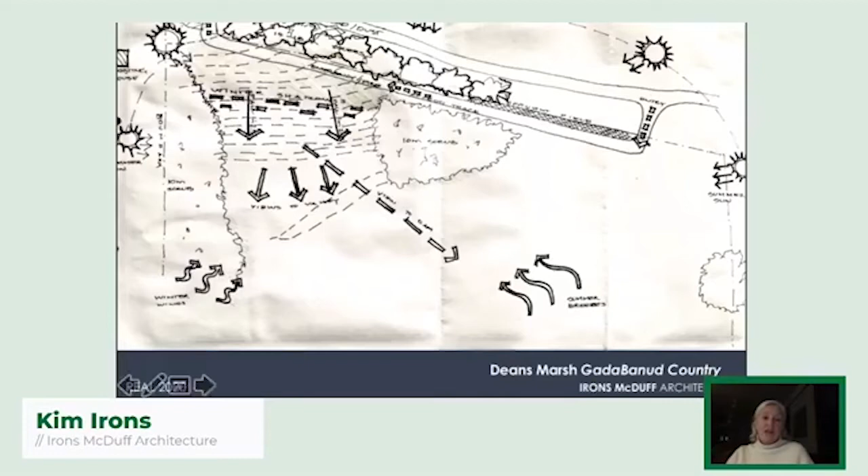We also explored the context and especially the utilitarian shed, which the client was very drawn to. As you can see from this too, that idea of light structures on the landscape that are elevated above the ground plane, and in this case to also deal with flood levels.

So the proposition was a very long building that takes in all of the views across the site, almost like a form of shearer's quarters in a long extended row, but then cranked slightly to follow the contours of the site. Walking through, there's the main entry which enters at ground level, and then into a sort of discrete hallway until you go past these windows that expose the views.

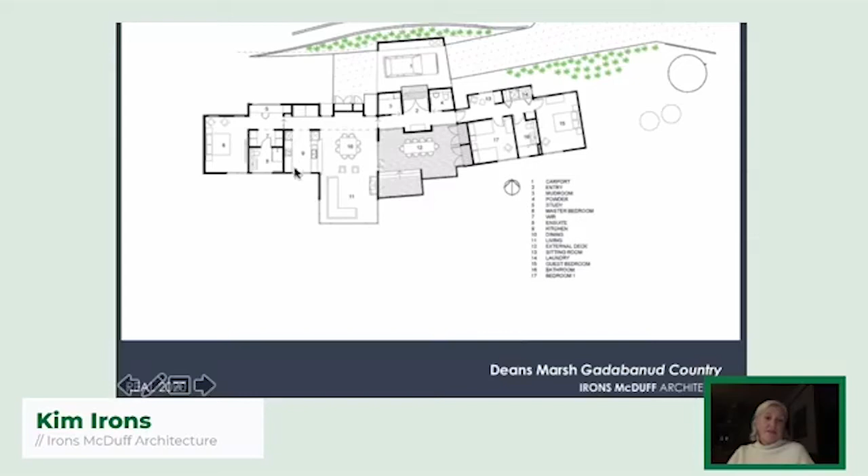Off to the left here, which is towards the west, is the dining and kitchen area, and then the main bedroom suite, ensuite, etc. And then to the right-hand side of the page is really the guest quarters, so 2 bedrooms with a bathroom and a small bunk space area.

The proposition becomes something that you enter at ground level to the roadside, but is well elevated on the southern side. There's approximately a 4 metre drop from one side of the building to the other, and it's only 5 metres wide.

The structure at ground is restricted to a series of columns into foundations that actually bind the ground in, to reduce the slippage component of the whole property.

We also explored through this the idea of the collection of sheds as additions, which we often see in the local vernacular, into the principal form, particularly where the lower pods are to the front, are specifically lower so that there can be high-level windows above them.

In another bushland setting at Aireys Inlet, we explored similar principles, but in this case there were adjacent dwellings on the slope site, either side and across the road. So we investigated how we could flow the house down the site and create a compact footprint while retaining a sense of bush escape for city visitors.

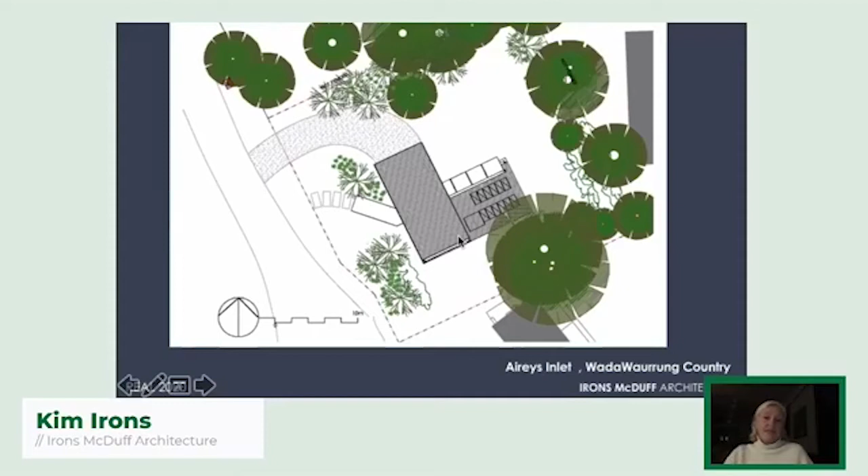So the principal form really wraps itself like an arm, sheltering the northern garden area from the southwesterlies and focusing on the bushland space within. Working through diagrams used to explain the approach, we also filtered the integration of aspects down to associated elements, including sun, ventilation, and views.

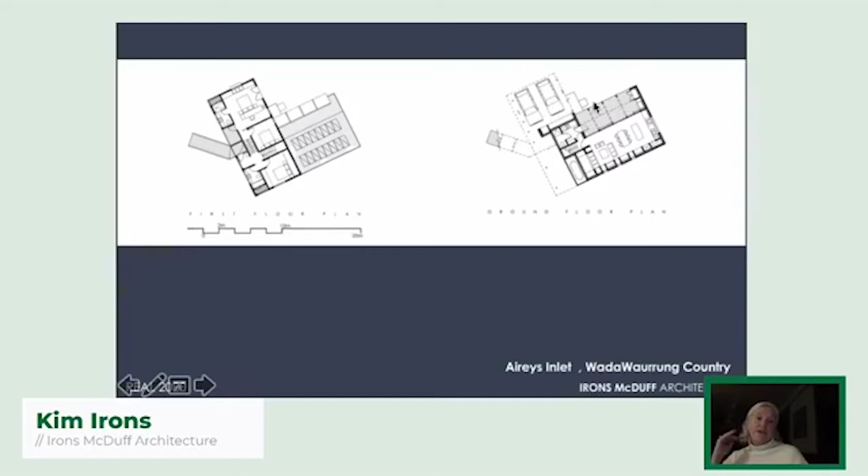The floor plan can be a little bit complex to understand. The left-hand side shows what we call the entry area, a ramp that leads up into the principal sleeping zone with 3 bedrooms split on 2 levels, and then down a flight of stairs to the right, leading into the broader kitchen living space. A north-facing deck also becomes the second entry into the house with car spaces adjacent.

When we also go analysing sites, there are others, such as at Portarlington, a newly subdivided site in a more suburban setting with north-facing front garden and distant views to the bays. It's a very slightly sloped context, including a Victorian heritage dwelling to the west and a 60s gable to the east.

So the site analysis here becomes something a bit more layered. It includes diagrams associated with climate, wind, sun, etc., and views, but it also picks up issues to do with privacy and overlooking, potential overshadowing from neighbouring properties. And there's a red element in the centre that shows the views being somewhat marred by a massive electricity pole.

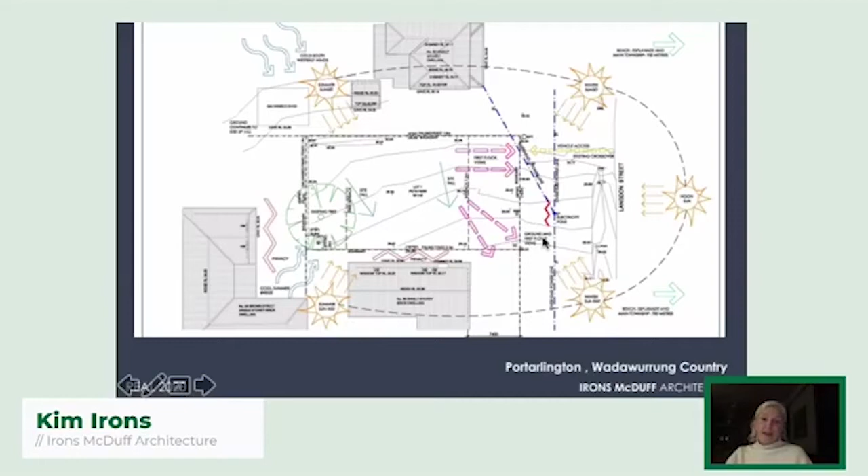So it's important to us that we always set up a context of elevations so that we understand, we can see this in a 3D form as well, and not just as a plan.

So here you can see that the Victorian cottage is quite elevated, even though it's only single storey on the right-hand side to the west. We have an electricity pole in the middle of the site, more or less, and then a low 60s dwelling on the left-hand side.

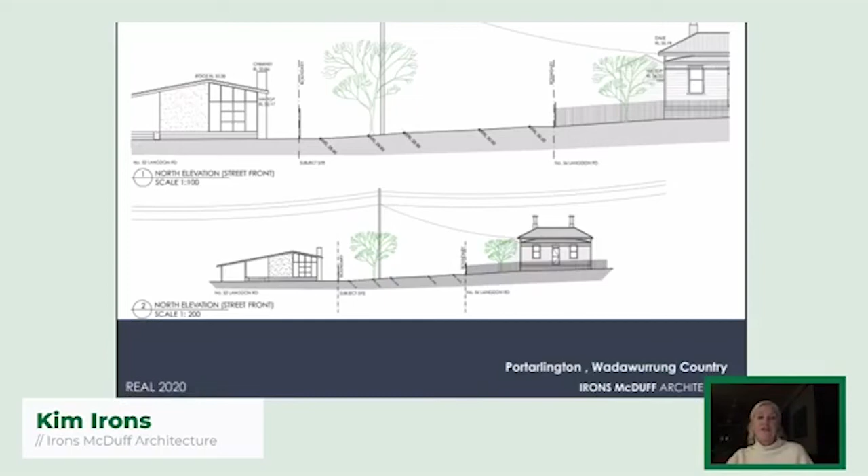So our response was to bring in a 2-storey element towards the Victorian side that starts to become of a similar scale to that building, given that it's a more elevated platform, and then uses a sort of long lean-to 60s-70s form leading down to that 60s house on the low side.

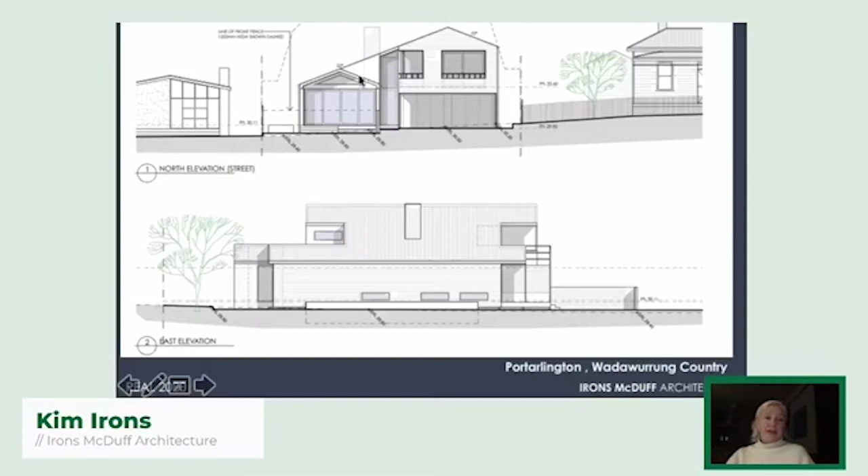Not that that 60s house will always be there, but that was our response also to the overall site and the program. And again, we use diagrams as a sort of reductive explanation of the concepts and the response to the principal ideas of circulation, climate response, massing and zoning.

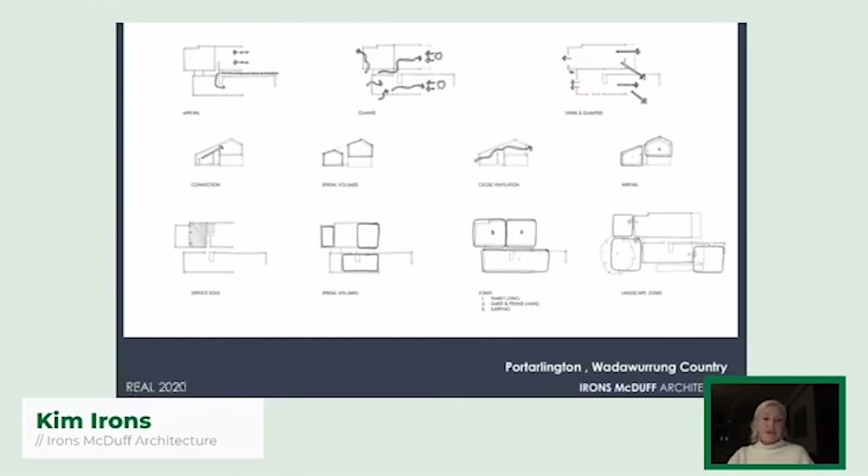Hopefully they're straightforward. So here you start to see how we've taken those diagrams - diagrams associated with zoning, circulation, etc. - and we start to allow them to inform the architecture.

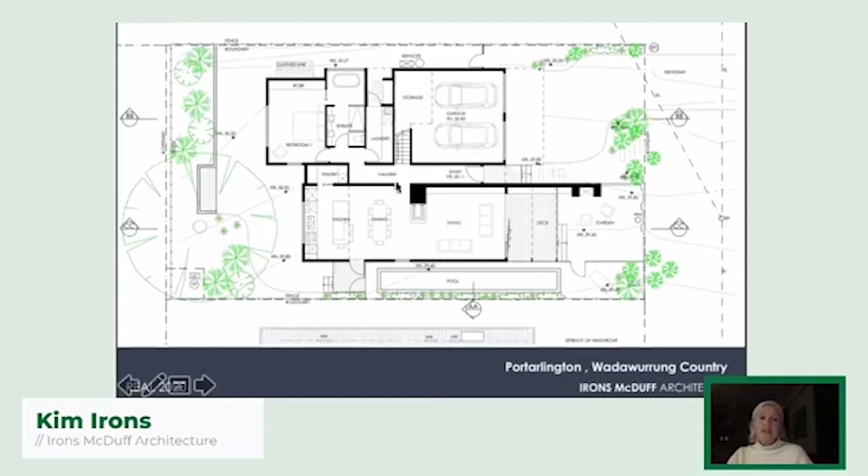So here we have organisation with an entirely open living, dining, kitchen area to the eastern wing as a singular space, and then bedroom or main bedroom with ensuite, a shared bathroom and laundry to the lower level, and the garage. And at the upper level, we have the zoning for the younger adults, with an upper living zone and then 2 bedrooms and a bathroom, but still with a visual connection to the lower level through the living room wall to the east.

We'll also look at context in terms of not just plan, but form, as we said. And sometimes that form is about how can we proportion. So we were dealing with a heritage dwelling to the right-hand side, and we started to explore the idea of proportions, not just the gable forms, but equally the proportions and how that form might be respectful to the adjacent heritage property.

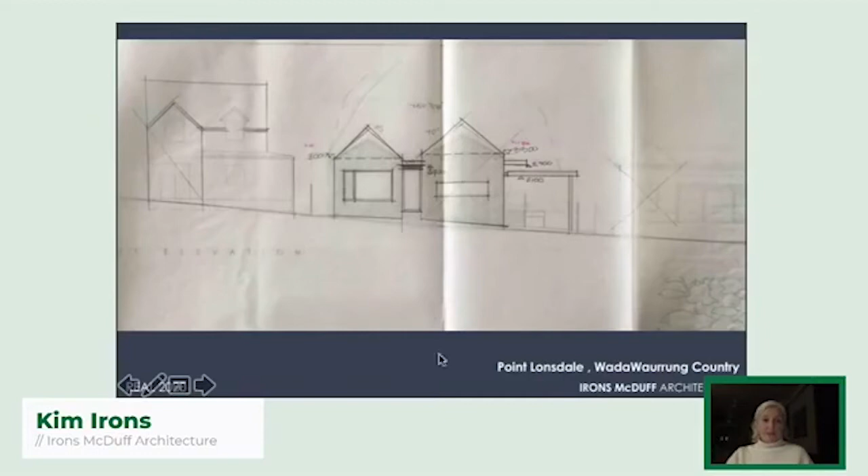Again, looking at the plan, the heritage property is shown to the top of the page, on the northern side. So our building seeks to step the wing closest to that further back, so that it's being respectful to the heritage dwelling, while the other wing steps forward. Then all the kitchen, living, dining zone is oriented to the north, bedrooms and amenities oriented to the south.

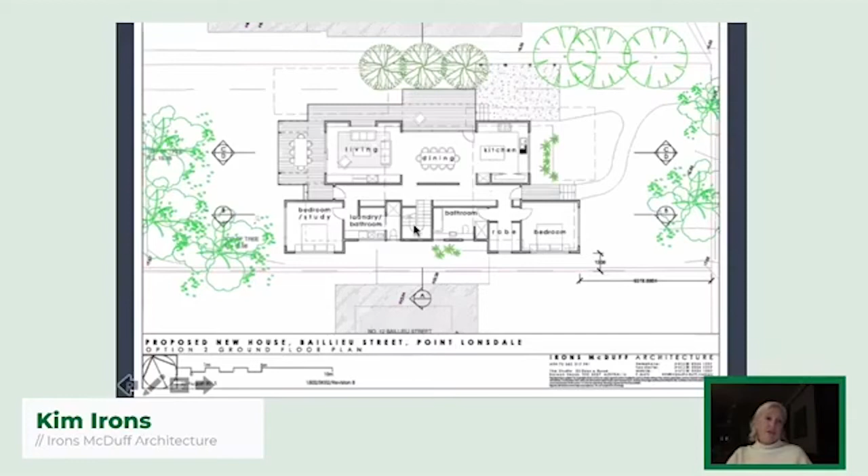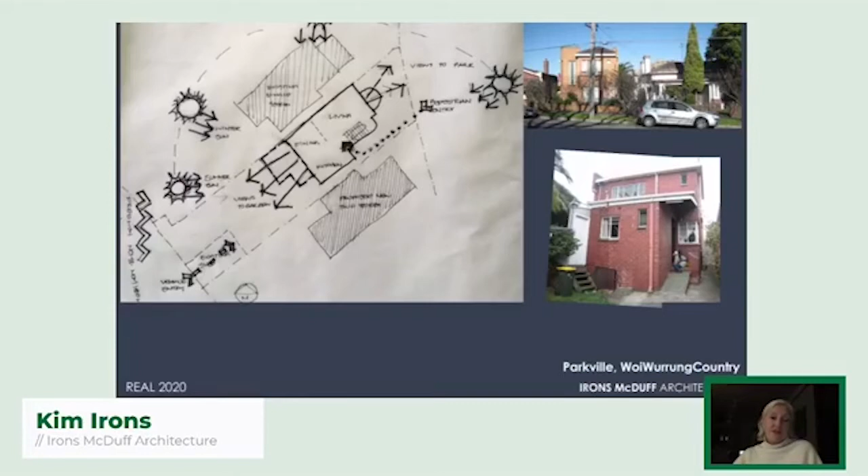But then, of course, in the case of alterations and additions, the context is layered with an existing built form. So often we're finding ourselves analysing the core elements, the critical spaces to match the program, or the most sound and robust elements of the existing structure. And within a city context, we're also looking at other impacts, not just adjoining properties, but particularly in this case, the proximity to freeway noise.

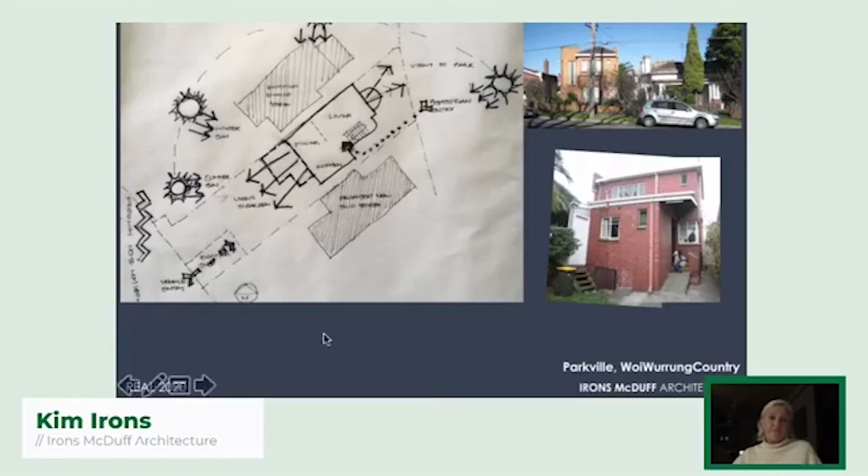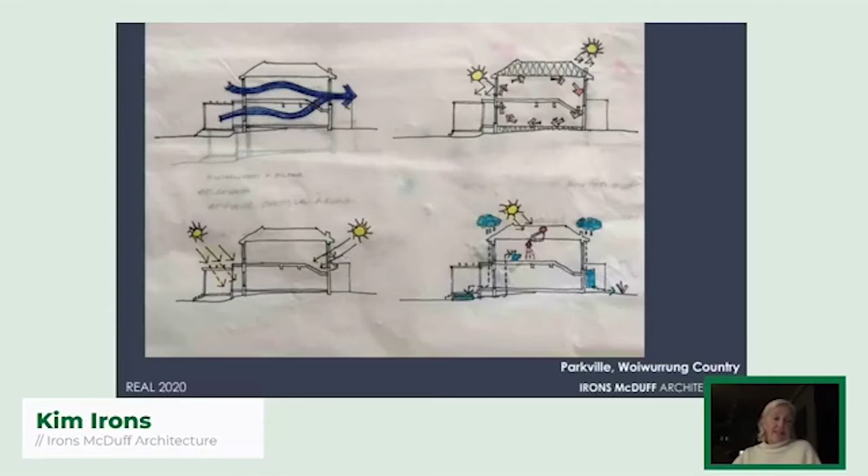So again, our response explores through sections how we might maximise our response to climate, particularly in this case where you'll see in the next diagram, we had an existing building with a north-facing wall that was completely solid because it was on the boundary.

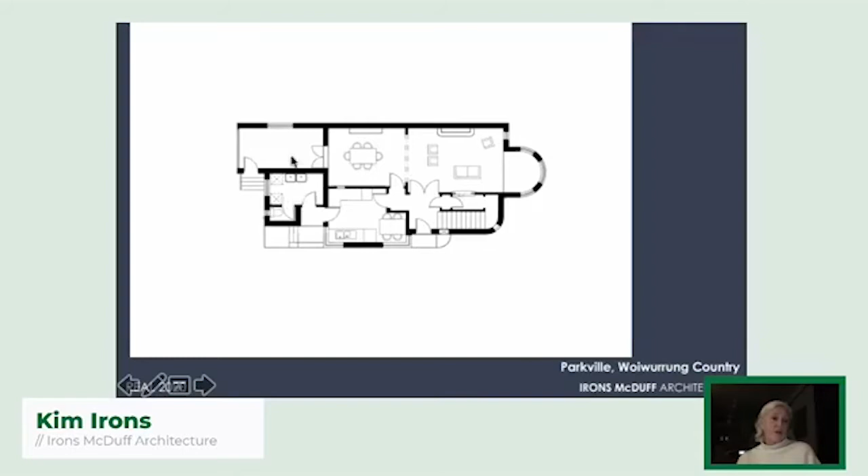So here we use the existing footprint and then start to explore what are the key elements required to meet the program, but also in this case was particularly around connecting the property back to the garden. You can see on the left-hand side some arbitrary utilitarian spaces that block the views

from the dining space into the garden area. This is a two-storey building, so the decision was to pare the building back to kitchen, dining, living with the main stair, and remove all of that utilitarian area as an enclosed space, creating a new outdoor deck area with a cute little outdoor bathroom and shower.

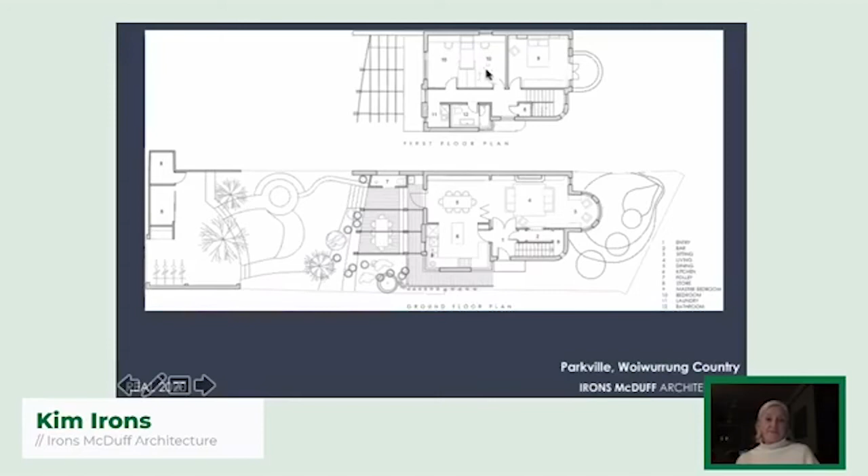So sort of recreating the backyard toilet, or the backyard dunny as we used to call it with the client. And then upstairs we've retained the idea of 3 bedrooms, but reconfigured bedrooms noted there as 10 and 10 to maximise the space available.

Obviously, in residential projects, clients are the principal people in our work. They inform the program, how many people, how many guests, how would they like to live. However, we do believe we have an obligation to the community or the public realm.

So this might be through a respectful approach that does not dominate or overshadow, but there are also other aspects we're interested in pursuing. There are small gestures we like to integrate to encourage a stronger, more connected community and hopefully a better social outcome.

And I think at this present time, with us living in isolation under COVID, this seems an even more relevant approach in how we might value small moves.

There's a lot of evidence associated with the importance of visual connection to community and mental health, but also there's a lot of evidence in crime where properties with high fences are more likely to be subject to theft or home invasion than those with low fence or none at all.

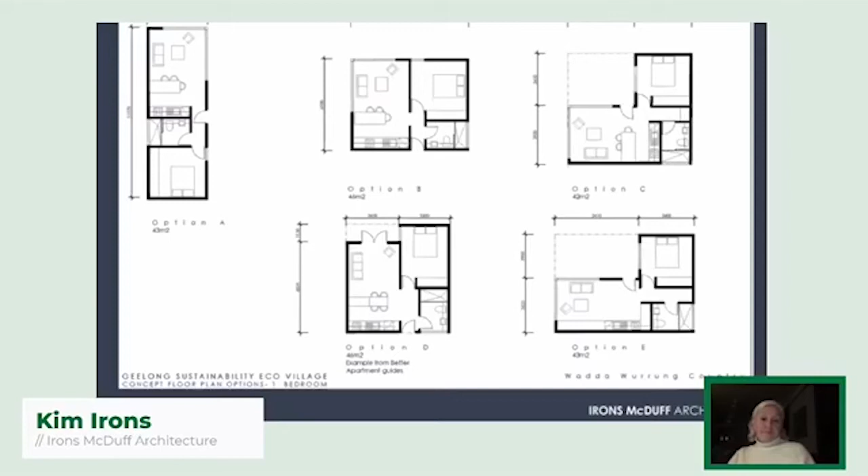We've been developing models of one bedroom, two bedroom, and three bedroom units, typically focused around a patio or terrace space that provides open space within a rectilinear lot, but also can in turn become a blurred private space that visually connects to the collective community.

We've started to explore sites, learning from cluster housing and Nightingale models—principles of connected, sustainable community with shared amenities, such as a larger communal kitchen and dining space so you can have guests over, or a common laundry, or common garden and workshop areas, so each property can be a little bit smaller because there's common amenity elsewhere.

One of the things we're looking at is trying to reduce the number of car spaces needed and have them co-located in one location rather than dispersed across the site, which is what we typically see in single-storey residential developments where the planning scheme requires the car to be directly next to the unit.

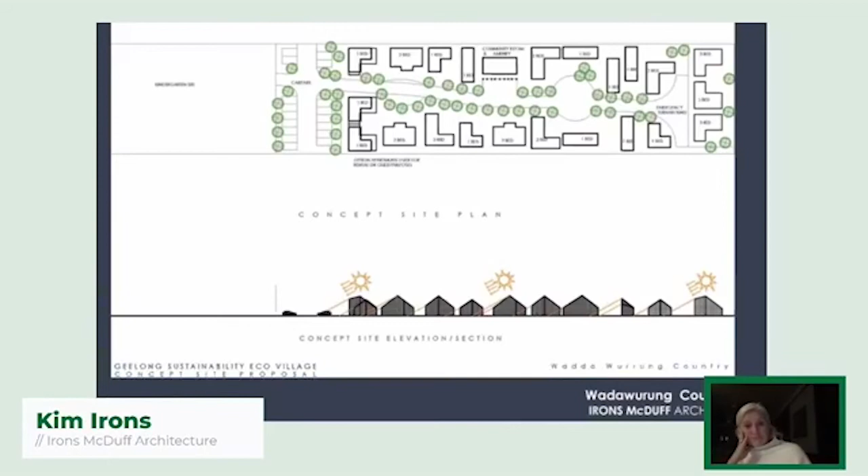So now we're down to pennies, which is essentially resources. I'd suggest this element is about resources, materials and energy.

These are aspects we bring up within the briefing process with our clients, and it's part of the document we issue asking questions about their ambitions for the project. While there are many regulations associated with energy performance generally, how far we extend this tends to come down to the client's own ambitions and commitments.

This has been discussed in a couple of these lectures before. As energy prices rise and alternative energy resources and equipment become more competitively priced, people are becoming more astute to improving the overall performance of their dwellings. So that's a plus, but the client does ultimately decide, and cost can be a factor.

There are some aspects we endeavour to pursue, particularly those not necessarily associated with additional costs—we consider them first principles. Things like smaller footprint, orientation, as we've already discussed, and zoning. Smaller footprint allows less materials and less resource, and zoning and smaller footprint can allow less operational cost to heat, cool and light a dwelling.

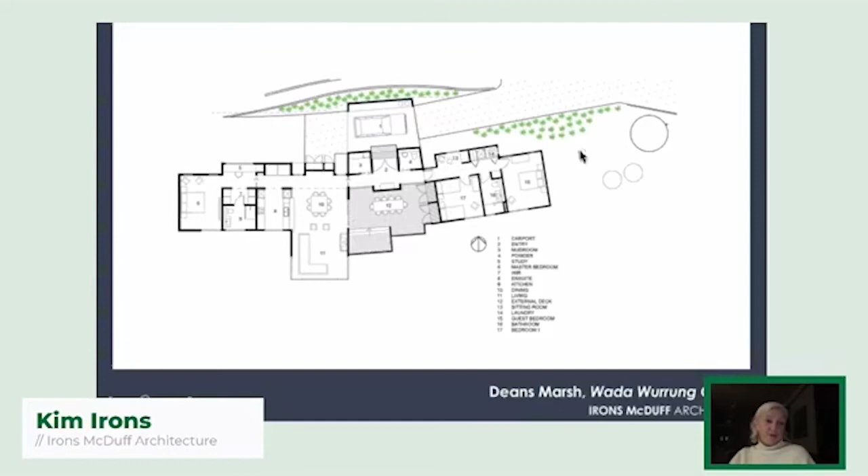So a pod externally with two little windows at exactly the right height for a bunk bed becomes the space internally for bunk beds for grandchildren and nieces and nephews to stay in. So again, a small footprint that's used temporarily to save resources, materials and energy.

And at Aireys Inlet, it was a series of small bedrooms for guests, but also a stacking of areas to allow additional sleeping space hidden beneath the floor of another bedroom, and steps used as storage.

And then in Parkville, there was a reduction of the whole footprint. So its approach to resources was about reducing the floor area, maximising natural daylight and ventilation by actually reducing the building footprint altogether. And as I explained before, the idea of taking off these old appendages on the back and creating what's more of an outdoor room that allows light and air to come into these internal kitchen and dining spaces.

And retaining the original old swelligant features, as we used to call them, of the house, but removing some of the more internalised aspects to the space so that there was more connection to outside, and creating that outdoor room with the outdoor dunny. And even things like utilising the laundry space at an upper level as a second personal washing space by simple methods like adding a mirror and making the trough out of ceramic rather than just a stainless steel basic trough.

And of course, there are other detailed material choices that we make that are common to all projects. So sometimes it's Hebel blocks to create thermal mass in a reverse brick veneer construction. More than often, in fact every time, we always use low VOC paints. We're using water-based products which are becoming more common and much less of a challenge to builders. We pretty much double glaze everything unless we're using particular locations for louvers that allow us to purge the house at night once the cool breeze arrives.

And I think our rule of thumb is insulate, insulate, insulate. It's an incredibly affordable aspect of building in the scheme of the overall costs of a build. We also look to optimise lighting without excess, including external lights that guide you into a space but don't necessarily glare. And we're really keen on sweep fans as much as possible rather than air conditioning. Victoria, for the most part, is a temperate climate, and fans can reduce the perceived heat in the order of 5 to 10 degrees in any one space.